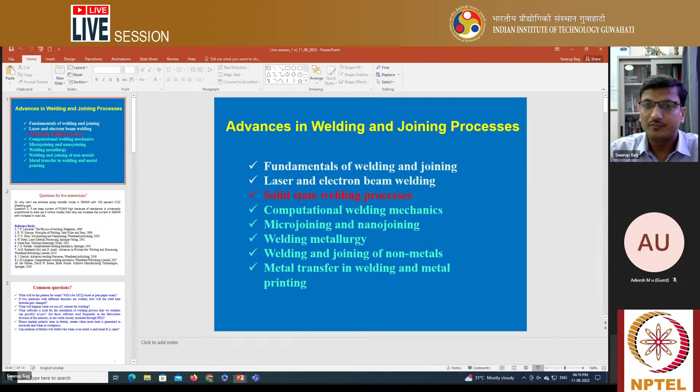Now, before interacting with you, I'm just trying to share my slides and discuss the first part. This course is Advances in Welding and Joining Processes. I think you've heard that there are so many applications of welding processes, and in most cases we find this kind of exercise done by trial and error method.

So without much understanding of the process, their applications, their limitations - these aspects. But in this particular course, I'm trying to present the subject in an organized way such that you'll be able to gain some understanding of the process and finally apply it to solve problems.

So that's why this course is designed with the following modules. First is the very fundamentals - the different welding and joining technologies and the surrounding elements. For example, what kind of current range we can apply, what kind of different welding processes are applicable for what kind of environment, and what kind of different types of materials. So that's the first thing I started with.

Next, the most widely and most precisely used welding technologies are laser and electron beam welding processes. In this module, I've tried to cover laser and electron beam welding. Apart from that, nowadays there's a lot of evolution in solid state welding processes, because many defects and environmental issues associated with fusion welding can be eliminated in solid state welding. So a lot of work has focused on developing different solid state welding processes - that is the third module.

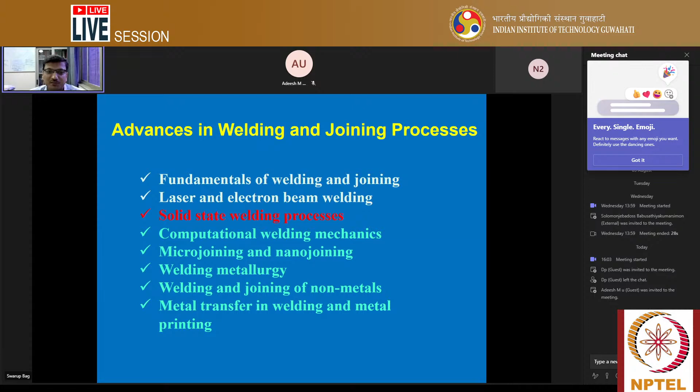Next module, we've tried to understand the calculation of different temperatures and the power requirement associated with the welding process. That's why this particular module is termed Computational Welding Mechanics - here some basic mathematical calculations I've tried to cover.

Next is Micro Joining and Nano Joining. Nowadays so many different welding technologies have been developed associated with a very small scale - specifically I'm talking about the medical industry, the requirement of micro joining, or basically how to join micro components. All these aspects are covered in this particular module.

Next, Welding Metallurgy. Metallurgy relates to the materials' structure, microstructure, and that is very important, because at some point we normally do welding without understanding the microstructural aspect. But for the long run, to understand the life of a welded joint, it depends to some extent on a well-defined microstructure, and that understanding is possible once we go through this module, Welding Metallurgy.

Apart from this, there are now so many components and applications where we find welding and joining for non-metallic materials is also required, or the joining between metals and non-metals. So the issues associated with this different combination of materials, I've tried to address in this particular module.

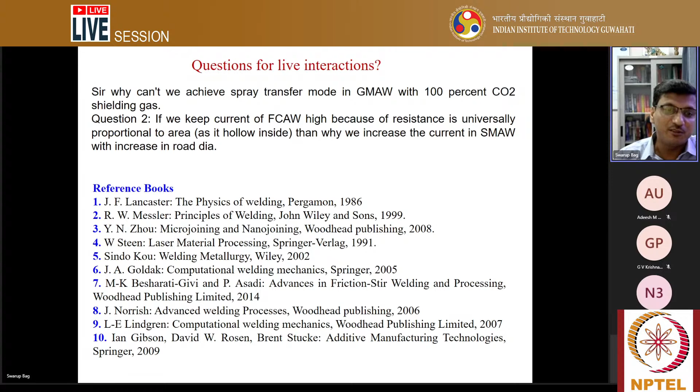I've observed in the last few years that most of the questions associated with the welding process are about what will be the pattern of the exam - in most cases that's the first question. Will it be MCQ based or a pen and paper exam? It's already declared what this pattern of the exam will be.

It will be multiple choice type questions, meaning you have one question with 4 different choices, and you choose the correct one. Most questions will be of this type, though in a few cases you may need to fill in some calculation or complete fill-in-the-blank type questions.

But what I remember from my course, you can expect all kinds of MCQ questions to appear in the exam, and it will not be a pen and paper exam. I think it will be an online exam where you have to choose the correct answer only.

But of course there will be some numerical problems, some mathematical problems, and some theoretical basic understanding of the theory - all will be covered. In certain cases you also need to follow the pattern of questions given in the assignment. Try to clear your concepts by solving the assignment problems - that is very important.

Next question: if two materials with different densities are welded, how does the weld heat formula change? We'll discuss how we can estimate the heat input during the welding process. What will happen when we use AC current for the welding process? That's the next question - we'll discuss that in a different module.

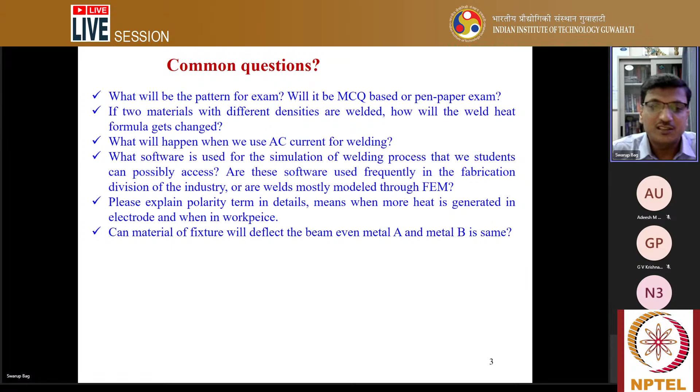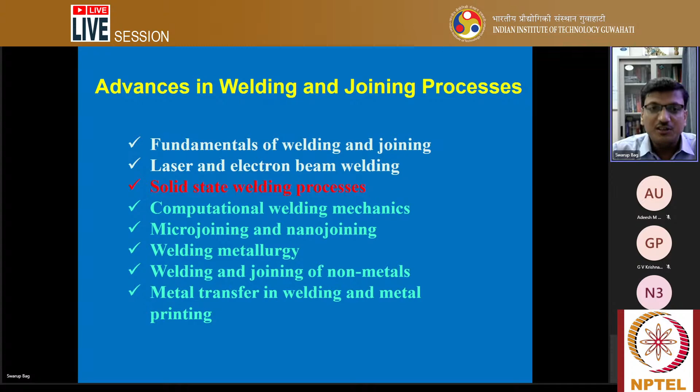I assume this part is covered - the fundamentals of welding and joining, and laser and electron beam welding process. Maybe these two parts are already covered, so I'll try to discuss the topic associated with these two particular areas.

Now, to understand the physics of the arc welding process: there's a metallic plate, and you make a circuit, applying current and voltage there. Normally in the welding process, we apply very high current but very low voltage - not like our domestic line of 240 volts. That kind of supply is required, but during welding we don't need that much voltage - maybe 20 volts is enough, but current can be very high.

That's why different polarity is normally used - for example DC plus, direct current, or AC current can also be used. Different welding machines have different capabilities - either the source converts to direct current or converts to AC current also.

This definitely creates an electrical circuit, and that electrical circuit converts electrical energy to thermal energy by creating an arc - either positive to the workpiece and negative to the electrode, or the other way around, positive to the electrode and negative to the workpiece. When there is a flow of current, it creates the arc, and the arc melts the material, which then joins the two metallic components, and after solidification we get the final weld joint.

Here the electrical energy is converted to thermal energy. During this conversion, there must be some amount of heat loss from the surface, due to convection and radiation from the surface.

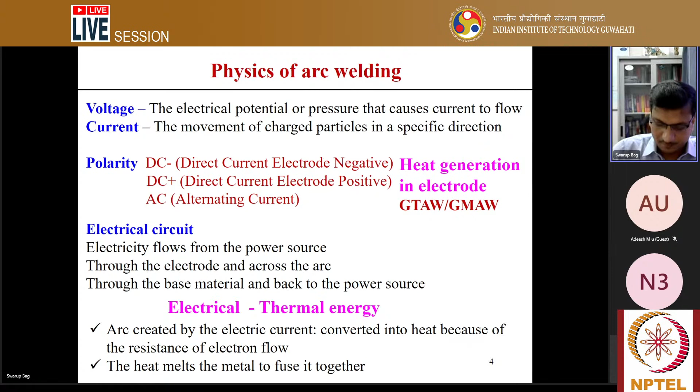Now, regarding the role of shielding gas: the purpose of using shielding gas in a welding process is protecting the arc and the molten weld from contamination by the outside atmosphere.

Sometimes we can directly use shielding gas, or sometimes we can use slag coverage by chemical reaction in the arc. This creates a slag formation which is lighter, floats on top of the weld, and protects the molten pool from contamination by the outside atmosphere.

So shielding can be provided both ways, but when talking about shielding gases, mostly inert type gases like argon and helium are preferred. They are normally used in most cases, but sometimes we can use carbon dioxide. The only purpose of using carbon dioxide is that its cost is cheaper compared to the inert type of gas.

That is the only purpose to using the carbon dioxide. But most of the commercially available gas metal arc welding process, we can use carbon dioxide as a shielding gas. In certain cases, for a particular application or material, we can use a combination of a certain percentage of argon and a certain percentage of oxygen, or mixing of two shielding gases.

This can also be used, and it entirely depends on what type of material we are utilizing. Of course, shielding gas has a role in the stability of the arc, but that is a secondary role. The primary role for metal transfer entirely depends on the current or current density used in this particular process.

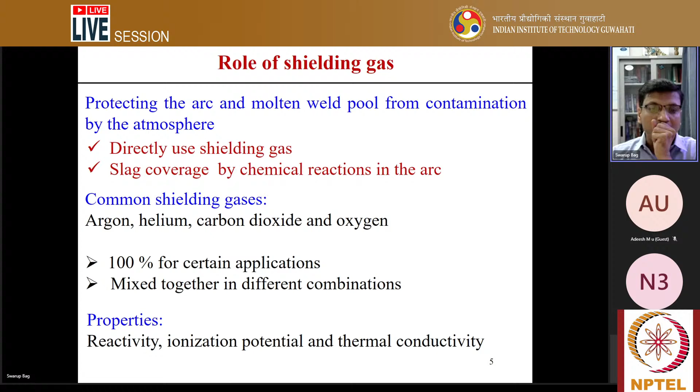So with high welding current, the current density and melting rate will be much more, and there will be a greater pinch force, which is opposite to the drop holding forces. With greater pinch force, some kind of electromagnetic force will be acting, and surface tension force will always try to hold the molten droplet, while the pinch force will try to detach it. When there's competition between these two forces and greater pinch force is present, more droplets are created rapidly, and they pinch off very quickly because of the high pinch force.

Since the droplets are formed very rapidly in a very localized area, the droplets created are usually smaller in size. This is only possible if you use high welding current. Using high welding current actually increases the overall temperature because the heat generation will be much more at the electrode.

But at the same time, when temperature is very high, it actually lowers the surface tension force. Since surface tension force is the drop holding force that tries to keep holding the droplet, once you lower this drop holding force, the other forces dominate, and the droplet can be created very quickly. That's why at high welding current, a spray type of metal transfer is possible.

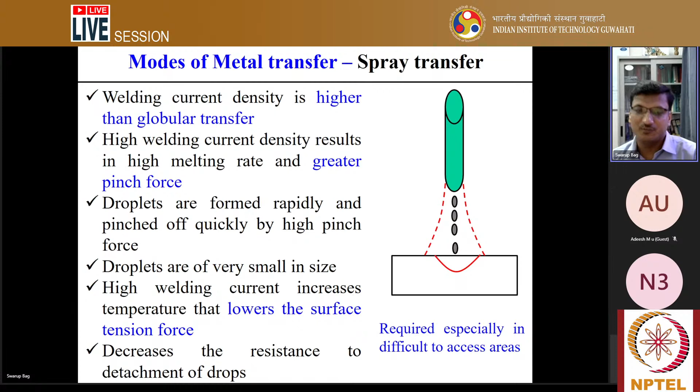Now sometimes we get confused about the enthalpy of melting - what is the amount of heat required to join the material. The heat required to melt a particular given volume of weld actually depends on two things.

One is the heat required first to melt - melt meaning there is a transformation of phase from solid phase to liquid phase. In that case, we raise the room temperature to the melting temperature. Second, the latent heat is also required to change the phase from solid to liquid. So both have to be accounted for, and combining these two gives the required amount of heat for a given volume of weld. So we can calculate what heat is required for a given volume of weld.

Rho Cp specific heat melting from room initial temperature to the melting temperature - that is the amount of heat required, and that is associated with specific heat plus the latent heat needed to change the phase from solid to liquid. That heat has to be accounted for. So combining these two is actually required to melt a given volume of the material.

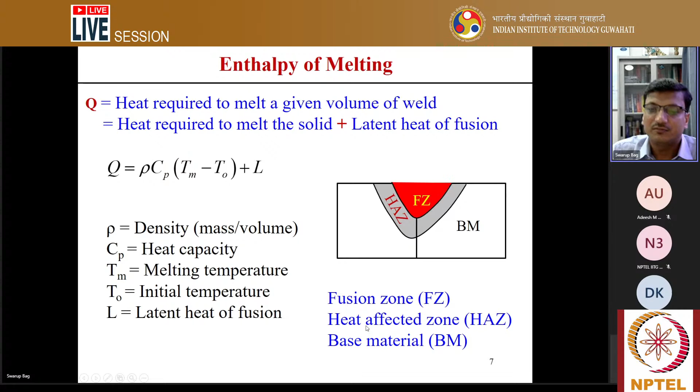Sometimes we try to look into the fluid flow also. The surface active elements actually modify the weld pool shape. In an organized way we can utilize the surface active elements beneficially. For example, when there is an application of surface active elements, it tries to change the material flow pattern within the small molten weld pool.

That flow pattern actually decides the shape of the fusion zone. The dominant driving force for the fluid flow, the material flow, is mainly the surface tension force. Surface active elements modify the nature of the surface tension gradient, and once the surface tension gradient changes, it influences the flow pattern. It can even change the direction of the surface tension gradient, positive to negative or negative to positive. That gradient decides the flow of molten material from one point to another.

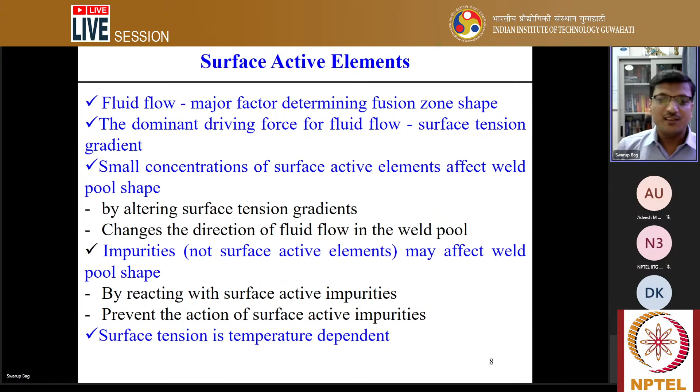Once there is a change in the flow pattern, that changes the shape of the fusion zone. We can utilize this in such a way that we understand how the surface tension actually acts. Sometimes this is called Marangoni convection also - the magnitude and direction of the surface tension gradients is associated with the Marangoni convective flow of the liquid molten pool from one side to another.

So the material can be the same, all welding process parameters can be the same, but the difference is the application of a small amount of surface active elements to a particular material - yet you can expect the shape of the weld pool to be different. This second case can be utilized beneficially, because it makes it possible to reach high depth of penetration even for the arc welding process with very low width, which is practically most useful compared to the flat pattern of the weld pool.

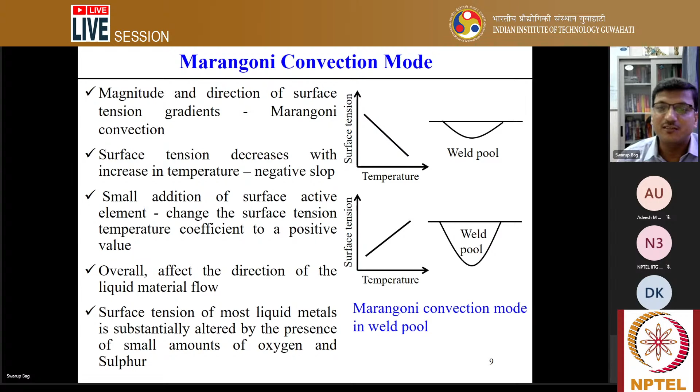That's why surface active elements are used, but they can be used in different ways. In certain cases, small amounts of oxygen and sulfur may be present within the liquid metal and can act as surface active elements. Of course, there is an optimum value - not any amount of sulfur will act as a surface active element. There is a specific amount of sulfur or oxygen that can act as a surface active element and change the welding weld pool shape.

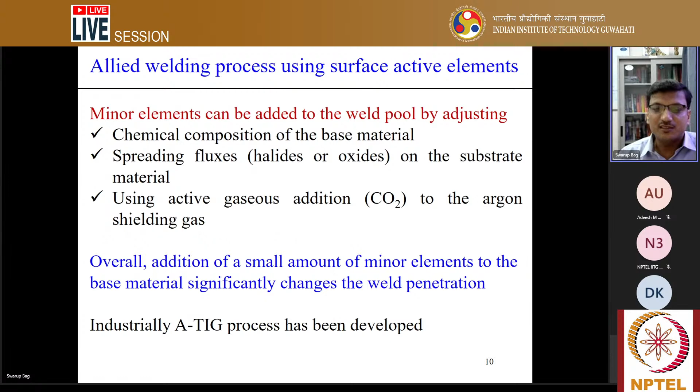For example, small addition of carbon dioxide to the argon shielding gas can act as a surface active element. So there are different ways of application of surface active elements, and once we make use of this in a controlled way, industrially activated TIG welding process has been developed. It's a modified version of the TIG or gas tungsten arc welding process. So this is the application of surface active elements in a beneficial way, and accordingly different welding processes have been developed.

Okay, so I'm not going into that, that's not the purpose here. Sometimes we can discuss electron beam welding of dissimilar materials. If we discuss electron beam welding of dissimilar material, what happens? What is the particular point here? Sometimes the residual magnetism of the weldment in the fixture can be the ferromagnetic material.

In that case, there is a flow of electrons in the electron beam welding process. But there can be a thermoelectric magnetic field because there is a temperature gradient in the dissimilar material, due to the Seebeck effect. Once this Seebeck effect becomes active, since material A and material B are different - talking about dissimilar materials, if it were similar material the Seebeck effect would not be effective - once there is dissimilar material, when you focus the electron beam at the interface, there may be a possibility of deflection of the electron beam to one side of the material, because the magnetic permeability of these two materials differs, and here the Seebeck effect acts. So then it becomes difficult to join dissimilar metals using the electron beam welding process.

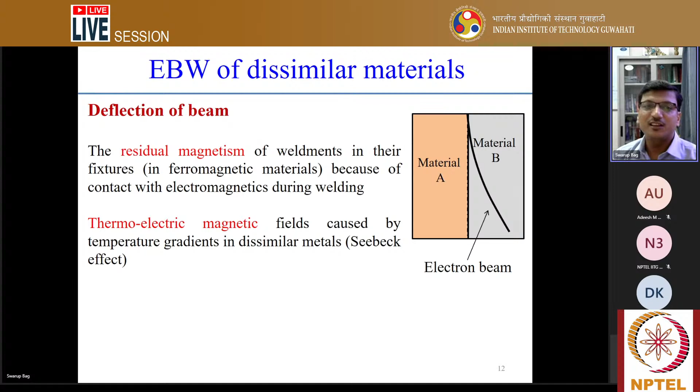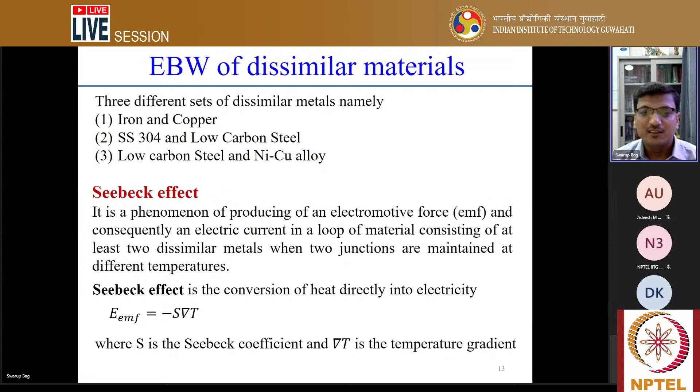So this is just the point. For example, sets of dissimilar materials - iron and copper, SS304 and low carbon steel, and copper-nickel - all these combinations of materials can have this kind of Seebeck effect, and then the electron beam profile can be deflected to one side. So you won't get a very good weld joint result.

Now there is another point I want to discuss. Sometimes we try to look into a comparison between laser and electron beam welding processes. Here you can see, in terms of weld joint shape, the electron beam welding process gives a very small or narrow width, but in case of laser welding also it is very narrow and smaller, but the electron beam is narrower or smaller, width is very low as compared to laser welding process.

Talking about penetration, deep penetration can be expected in case of the electron beam welding process, but laser welding lacks that much penetration compared to electron beam welding process. So for very high thickness material, if you want to join, electron beam welding is preferred over laser beam welding process.

Welding speed: electron beam welding process can scan the beam at very high speed compared to laser. Shielding gas: since electron beam welding process is done under vacuum, all operations can be done there without need of any shielding gas. But in case of laser welding process, nitrogen or argon shielding gas can be used. A vacuum chamber is required in case of electron beam welding, but not required for laser beam welding process, since laser beam welding uses shielding gas.

Cost of the electron beam welding system is very high compared to laser welding process. Generation of X-rays is possible in electron beam welding process, but not possible in laser welding process. But efficiency is more in case of electron beam welding process compared to laser welding, which is very low.

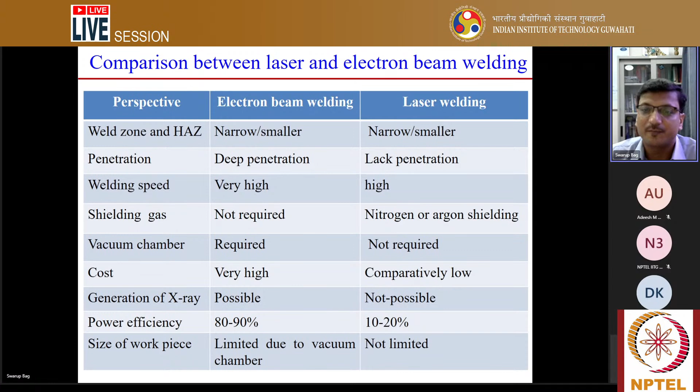But in cases where I mention it may lack penetration, this penetration is much more in laser welding process compared to the arc welding process. So laser can be used in place of arc welding process in a better way. So I think that's all for this discussion. Now if you have any query, we can discuss further also.

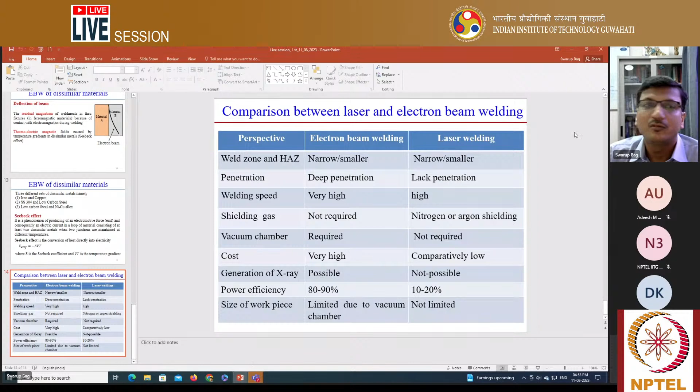Okay, so if you have any query you can ask. What I can see is that sometimes there is some network issue, but I can see the sound is okay, fine. I'm just checking, using my own speaker.

Someone asked Anshul Sharma how to fill the undercut weld zone specifically during the end of run. In that case, simply make the consumable electrode, any part of consumable electrode, deposit on that zone, and in that way you can fill the undercut zone.